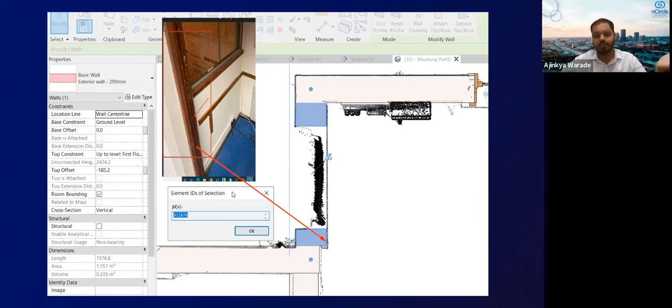So with that being said, the question that kept lingering in my head was, how do you know if the model is complete? He was really working hard and wanted to know if the model is complete or not. So the response was, once he corrects the model, it will be given back to the QC person, who would check and give approval on whether the entire correction is done or not.

But the other day when we met again and I asked him what happened, he said, again, we received a QC report from QC personnel for more corrections. So the QC report suggested corrections, and again he had to go through the entire model and check places where he needed to correct them properly.

That suddenly reminded me of a movie starring Tom Cruise, Edge of Tomorrow. It is a never-ending process for them. They are just reliving and redoing the same process over and over again.

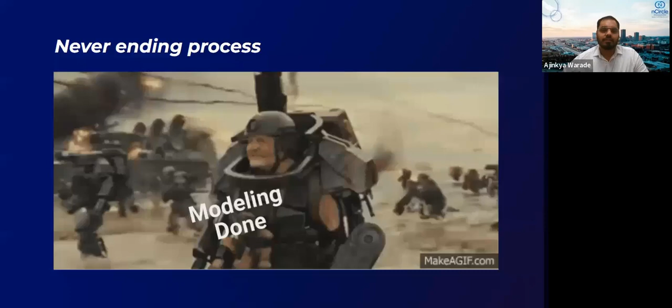So, when I started looking at the problem to solve, the first step that came to mind was, how about we make it easier for the modeler to go to that particular region so he can start working on correcting the entire issue.

And then, sticking to our motto of infinite possibilities, we decided to dive deeper into the problem statement. We went into a solution where we would calculate deviation of the point cloud around the BIM elements and record them into a report format.

Now, what happened with that is, let's say for an example, 7% of the model actually needed correction. So by doing this, our modeler knew that 7% correction is to be done - a finite value and a goal that he can actually work with.

So you have worked on projects, right? So with a report, it must have made things easier for you. So what do you have to say about that?

To be honest, Ajinkya, yes, in some sort, it was making things easier. But the team is dynamic, right? There are multiple members going in and out, and whenever a new member joins the team, the reaction that came was like, oh, these are just too many numbers, isn't it? So actually, we were doing the task, but as this image shows, task failed successfully.

So I think now you know that when you are trying to go into the depth of solving this problem, you have landed yourself into another problem to solve, right? Yes, precisely. It seems that way.

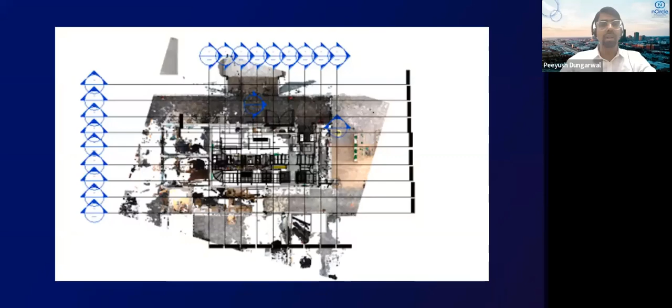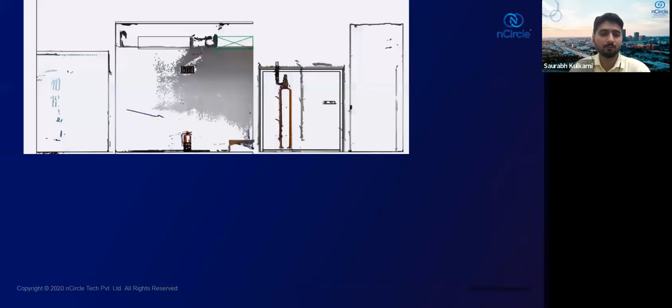Saurabh, why don't you show us the quick fix tool for this tiresome yet critical process, how you are now doing it with your internal team? Sure, Peeyush. So just before demonstrating, I would like to take all of you to one picture and ask everyone if you can identify some modeling errors inside this.

All I can see is a cross-sectional view and modeling versus scan data, but it's a little hard. Okay, now going on to the next one.

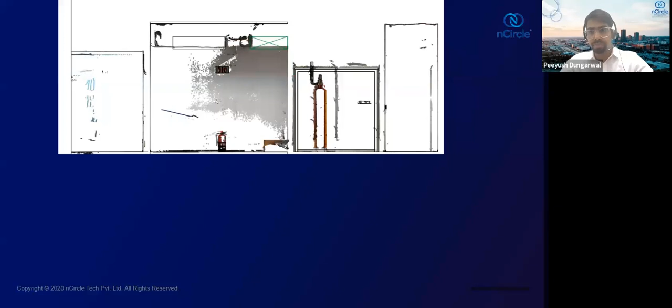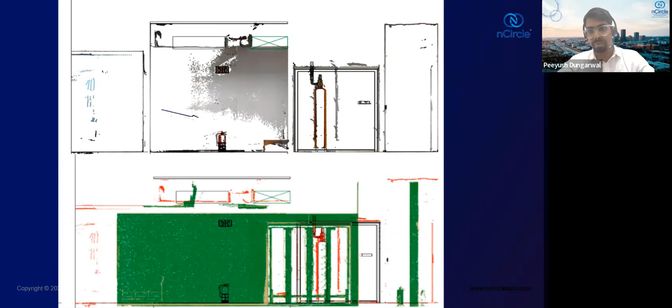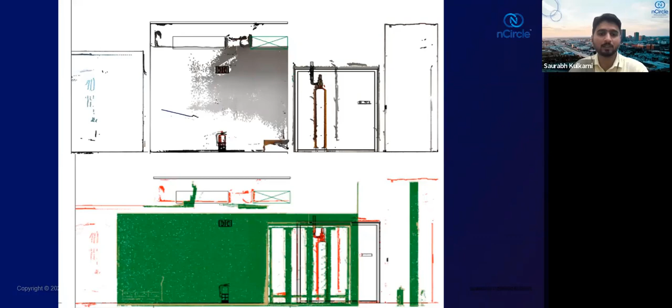Exactly. So the first image is the raw point cloud data with our model, and the second image is the point cloud data coming out of Deviation Inspector with our model. So here we can easily see the red line means something we need to check at our end.

So going on with the video. Here you can see the point cloud data is loaded inside Revit. Now we will be having three colored point cloud data. One is red, one is green, and one is yellow.

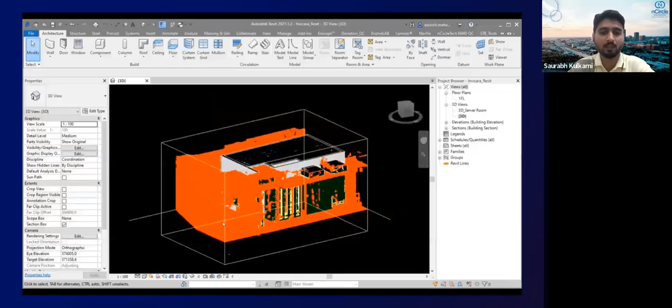Okay, so now here what we are doing is cutting a section, or having a small portion of the model, to visualize. Why small portion? Because we can spot the errors easily when we have a small portion to review, right? Whenever we are having some work, we will chop it down to small pieces to get it done correctly.

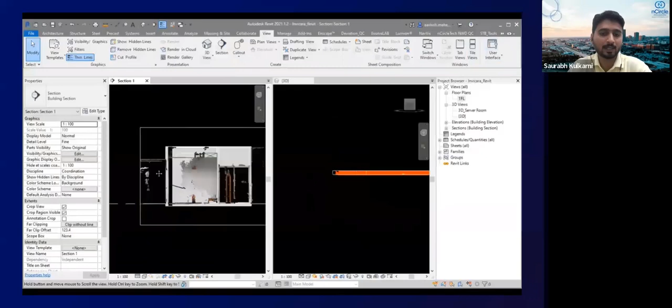Here now you can see we are just splitting the screen in two. We are adjusting the section, adjusting the model such a way that we will go through and swipe through the model entirely, but with a small portion only. So as you can see on the left one, we have cut it, we have the small portion of section.

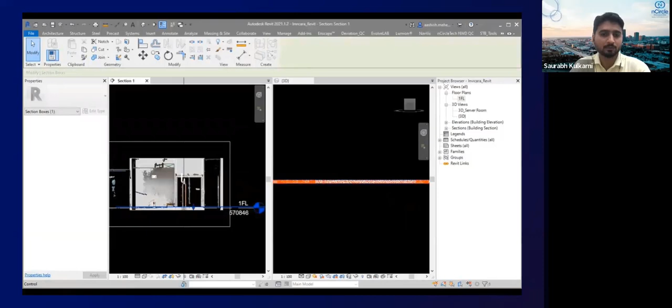And on the right one, we have adjusted the model accordingly, right? Now, what we'll be doing next is we will just go up with this section, and on the right, it will show up at different elevations how things are looking like.

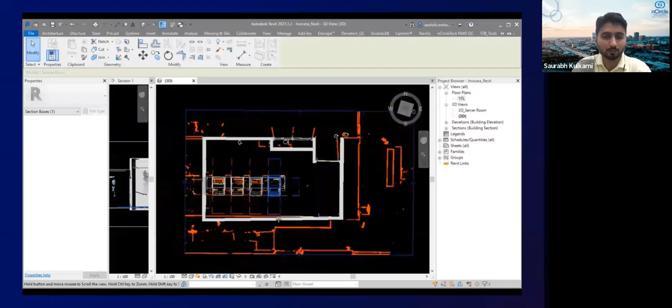Here you may also see many of the red elements or the red point cloud data, right? But it does not mean that these are out of scope, or that these are not modeled. I will show you how it is.

So here, what I'm doing is I've changed the color, or changed the transparency, of the wall. Now here, the wall is tilted. That's why we are getting the red, yellow, and green point cloud colored data throughout the wall.

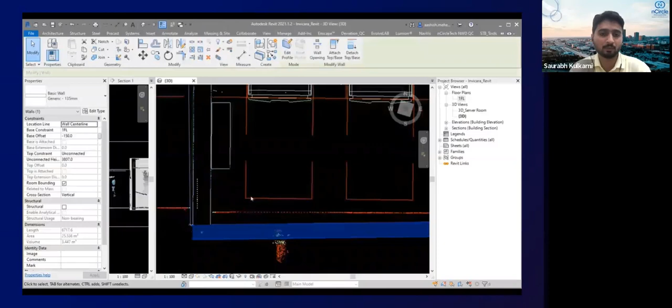It is because one portion of the wall is within the tolerance limit, the other portion is the cautious limit that we have set, and the next portion is completely out of the tolerance limit that we have. Now, by navigating through the section, we can see at each interval how things are looking like. And like I said, all the things which are in red does not mean that they are wrong.

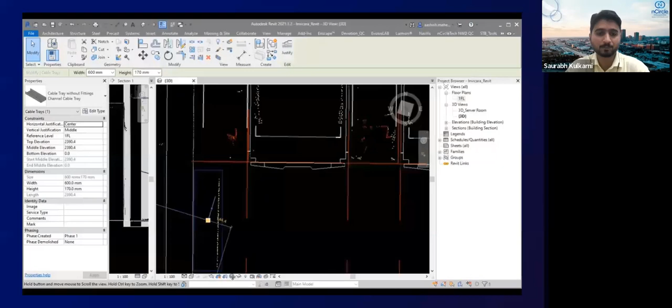Maybe it may be out of scope and we didn't have to model those, that's why it was left as it is. So this gives us a clear picture of whether things are in line with our expectations, or out of scope or out of the tolerance limit, and we can go through it very easily.

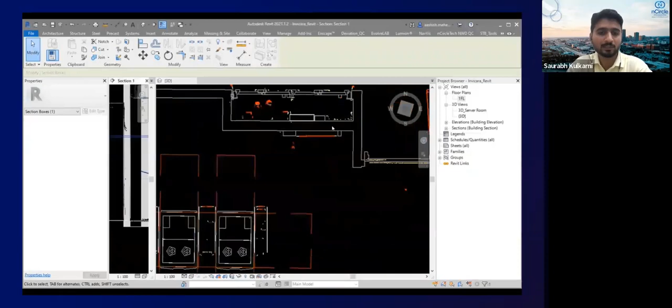Here you can see some of the panels which are partially out of the deviation limit. Again, here, I think Piyush, you can easily identify this. If I go through it up and down, you can easily identify the errors inside it. Anyone can do that.

So how it's helping me is I can quickly go through this and see before it reaches the client whether my model is right or wrong, or if something needs to be fixed before it reaches the client, because we don't want the client to come back to us with many QC issues or missing elements and ask us to redo those things. That's a never-ending chain.

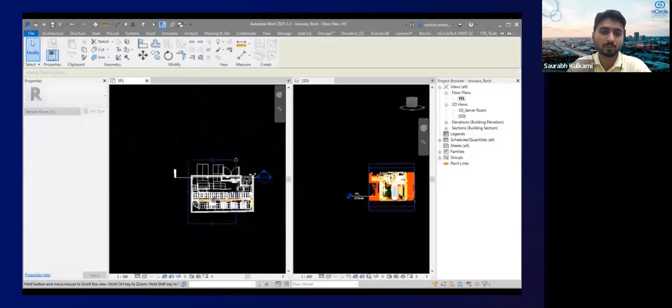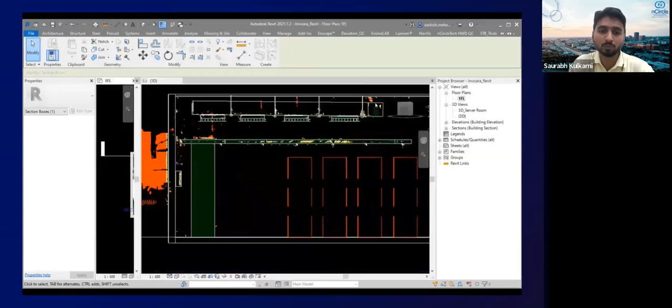That's why we wanted something, and now we have something that's helping us reduce our efforts in the QC process. Here, what we are doing is we've cut the section horizontally, now we've cut the section vertically, and we again do the same process. So on both sides, we are sweeping through the model entirely just to make sure nothing has been missed from our end.

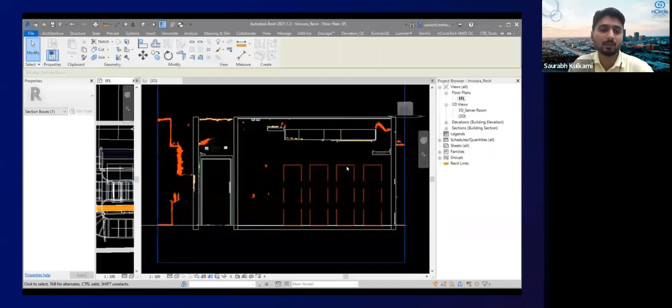Now here, in a couple of seconds, you'll see two ducts, one undersize and one oversize. Those are the same ducts shown in those images earlier. So now you can quickly identify these ducts were not modeled correctly, which was really hard to tell from those images.

So that's how it's helping, and that's how we are improving our QC process with the help of Deviation nSpector. Yeah, I think I need to bring it up again here.

The Revit hack tool, which we had mentioned as bonus content, has just been shown to you. You can easily split your screen, and if you want to closely monitor the last QC process before handing it over to your clients, you can just use this trick and quickly check your model within a minute and send it across to clients if you're satisfied with it. So that's something I wanted to emphasize here.

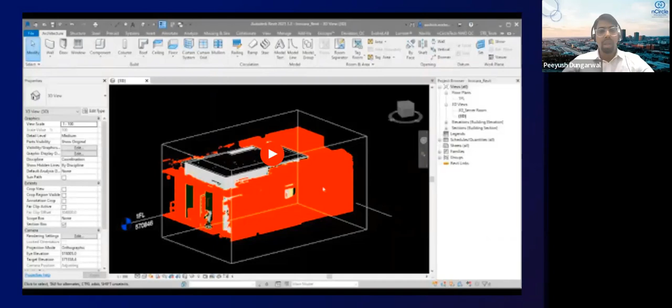All right, so Ajinkya, over to you. Yeah sure, Peeyush. So, over to the next slide.

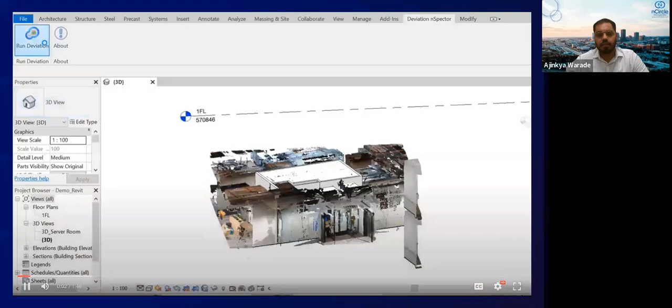Now that Saurabh has told us how we make use of the results from the entire Deviation nSpector tool, I would like to quickly demonstrate how we can generate those results. So what we've made is an end-to-end solution within Revit. We've created a plugin that would basically accept three things: limits, the first limit being the acceptance zone, and a color assigned to those point clouds.

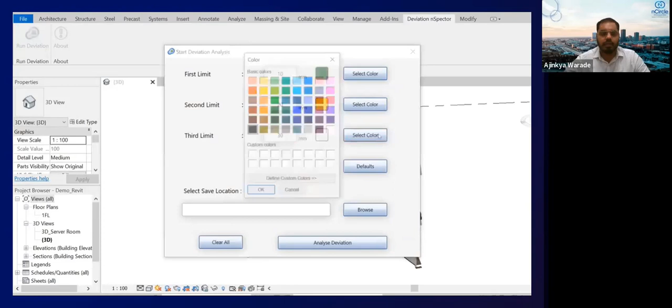Second would be the warning zone and its color, let's say yellow in this case. And the third is the non-acceptable zone that we denote with a red color.

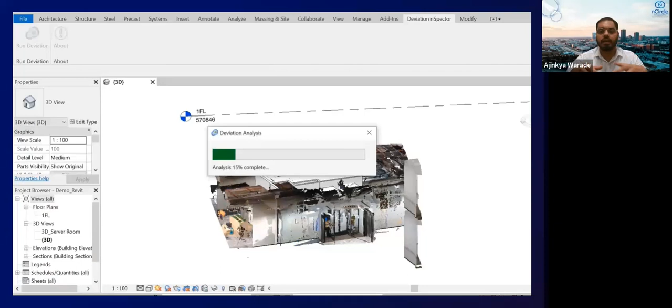Next, what you have to do is select a location where the processing and metadata will happen, and where the resulting point cloud files, the RCPs, will be stored. Once you do that, you trigger the process. Now what we're exactly doing here is processing the entire point cloud, taking everything into consideration.

If, for some reason, a modeler forgets to create an element at a certain position, then even though you're doing QC with respect to an element and the points around it, those points would never be highlighted because that element was never created. For that reason, we are actually going through the entire point cloud, and by doing so, we're able to generate results resulting in separate RCPs.

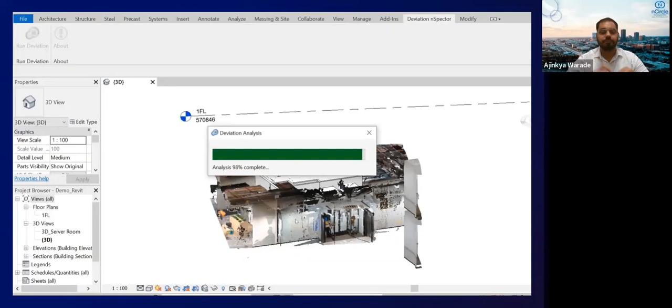So your entire point cloud will be divided into a 3-color spectrum. As you see, it's fairly simple, just a click of a button. You provide the input values you actually require, and once you do so, it will be automatically loaded back into Revit.

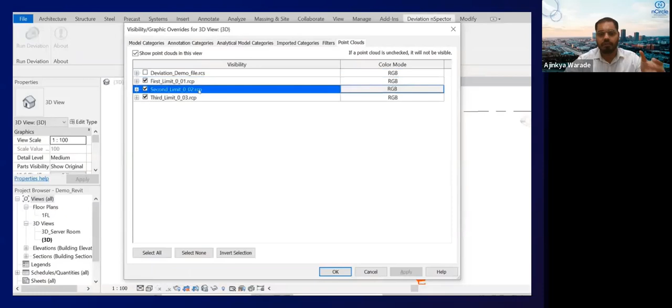And if I just increase the transparency of the model, you can see all the point clouds, green, red, blue, green, red, yellow, attached into your document, as well as having control over the visualization section, which you can keep on or off.

All those point clouds will be loaded as a modeler usually handles, with a simple RCP and attach point cloud links.

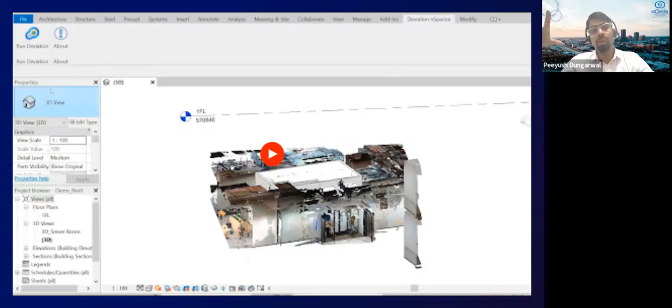Thank you, Saurabh and Ajinkya, for this explanation. We already have a few questions, but I'd like to emphasize two points where this tool helps. First, it's an easy to install tool within the Revit environment, so you don't need to take files outside and do something different. Second, with this color coded identification method, if you want to deliver to the client and just want a quick look around before delivery, it's a simple process to execute yourself. The third thing is it's super easy to identify missing elements, and it works across architectural, structural, and MEP elements. So that's what the tool is about.